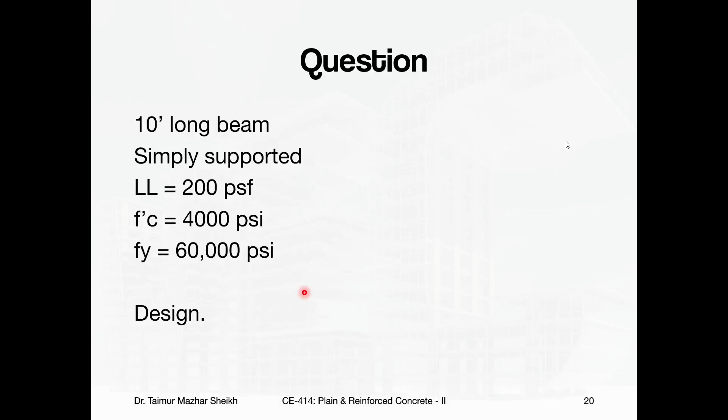ACI recommendations mein table 7.3.1.1 states ki the minimum thickness of solid non pre-stressed one-way slabs, you have simply supported for the height should be at least L over 20. Applicable for normal weight concrete and grade 60 steel only. To hamare paas grade 60 steel hai, so this is convenient.

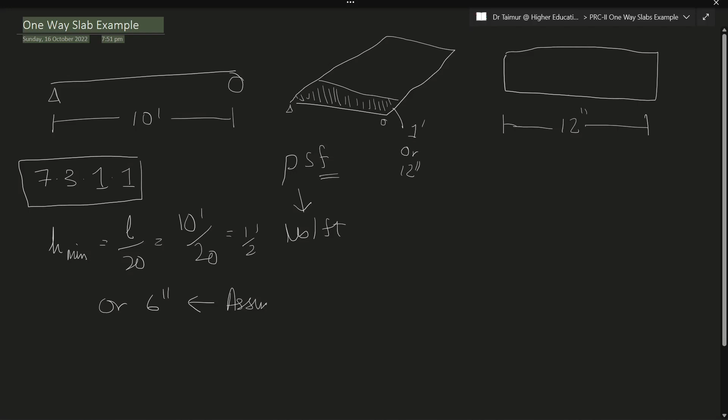To 7.3.1.1 ke hisaab se H minimum should be L over 20, which is 10 feet over 20, which is half a foot or 6 inches. To assume hum isko le lete hain. Hum isse bada le sakte hain, obviously we cannot take anything smaller than this. So assume H is equal to 6 inches. Step 1 done.

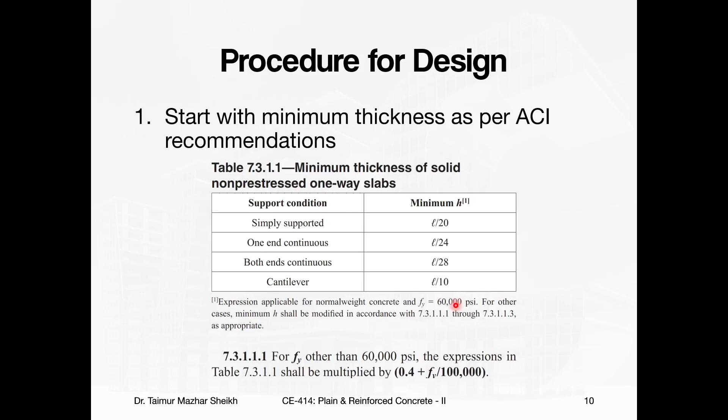Step 2, decide on primary rebar, adjust for cover. Ab jab main kehta hoon decide on primary rebar, main ye nahi matlab ki aap immediately kisi kism ka rebar select karoge, abhi maine number 4 daalna hai, number 6 daalna hai, number 8 daalna hai. What I mean is ki we have to adjust for cover.

Jab hum adjust for cover karte hain for a slab that is not exposed - hamare liye it is not specified whether it is exposed, so you can take this value. To isme you have two options, either for smaller bars or for the larger number 14, number 18 bar. Hamare paas almost definitely smaller bar will be okay.

Aur that's because if you take too big of a bar, then either you're introducing a compression failure, jo humne discuss kiya tha, same for slab mein bhi hoga as per the beam, or the spacing of the bars from one another will be so far away that it actually violates another maximum spacing guideline of ACI, jo hum baad mein isme dekhenge.

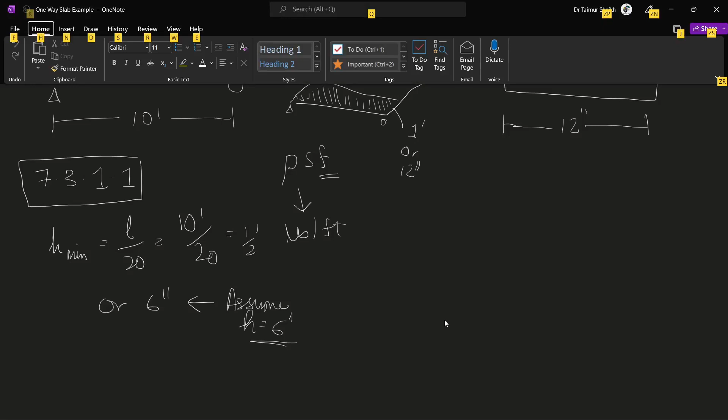To I'm pretty sure it is going to be smaller than number 11. The specified cover is 3/4 of an inch. That's for your measurement mein is table ka naam dekhna mat bhuliye: 20.5.1.3.1. Ye states karta hai ki cover has to be greater than or equal to 3/4 of an inch.

To hamare paas 6 inch ki height hai, isme se minus karenge 3/4, so you will have 5 and 1/4, which is a bit awkward. So assume let's take cover of 1 inch.

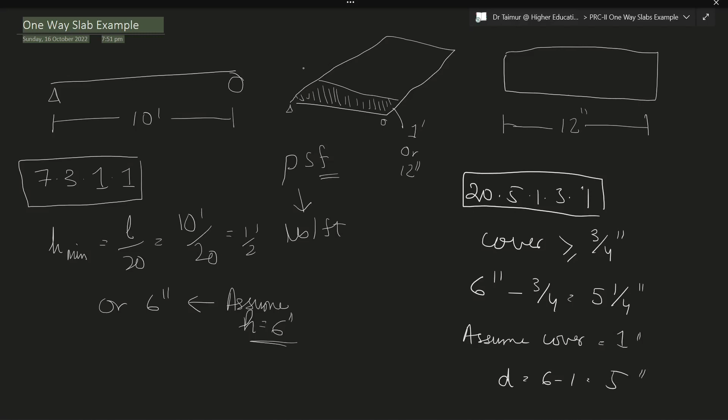Okay, so then you will have a value of d of h minus 1, 6 minus 1, which will be 5 inches. So at this stage we have progressed ki hamari jo total height hai, ya thickness hai slab ki, 6 hai, aur agar hum positions banaye slab ke liye, to hamara value of d depth, yaani ki from the top to the center of the rebar at the bottom, will be 5 inches. To abhi tak hum idhar sukoon se pahunch gaye hain, theek hai.

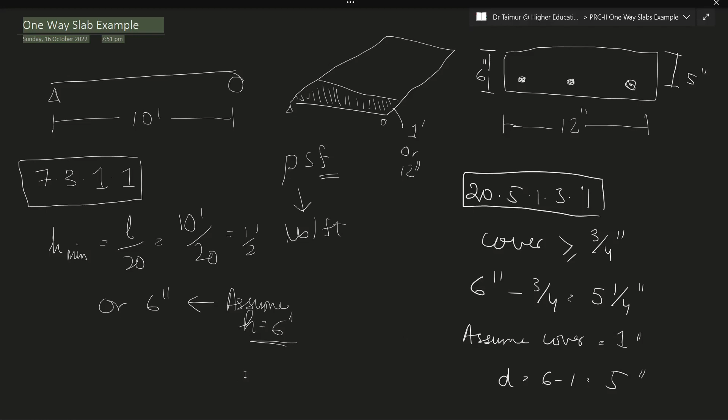Alright. Okay, what's next?

Ensure that whichever steel you've selected follows the specified steel requirements of minimum, at least this much, or maximum. Maximum, probably we don't need to worry about that, but at least minimum we need to figure out. So for this we need to solve this equation for rho minimum. For this we need Rn.

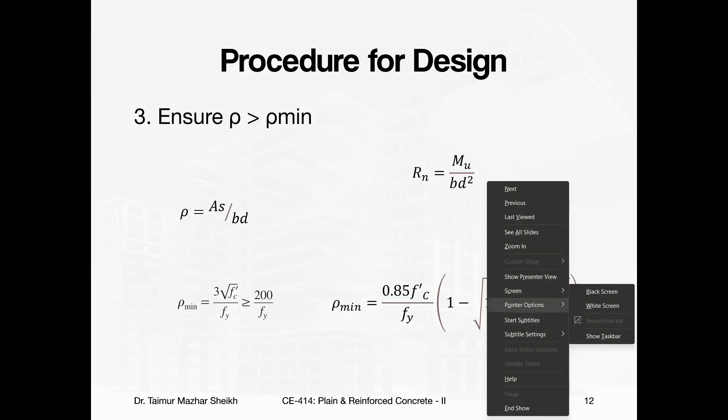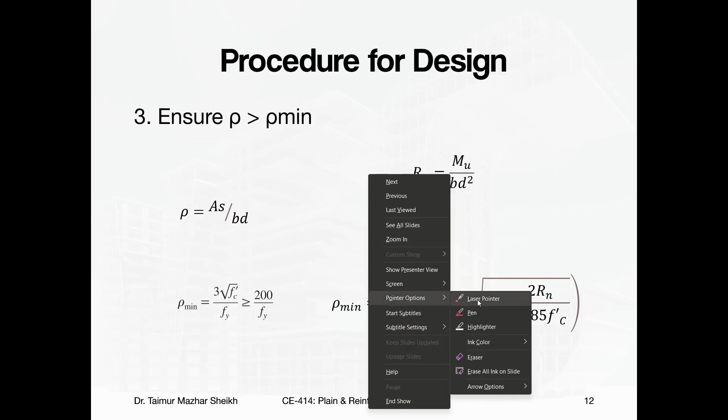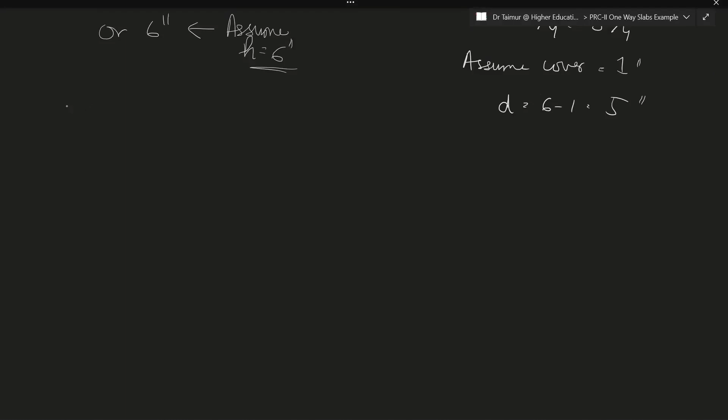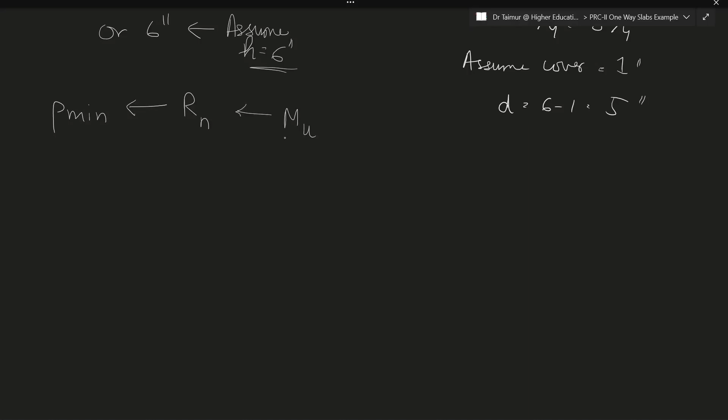So we need for rho minimum, we need Rn. For Rn, we need Mu. What is Mu? For a supported slab, W L square over 8. If you remember, for this we need W.

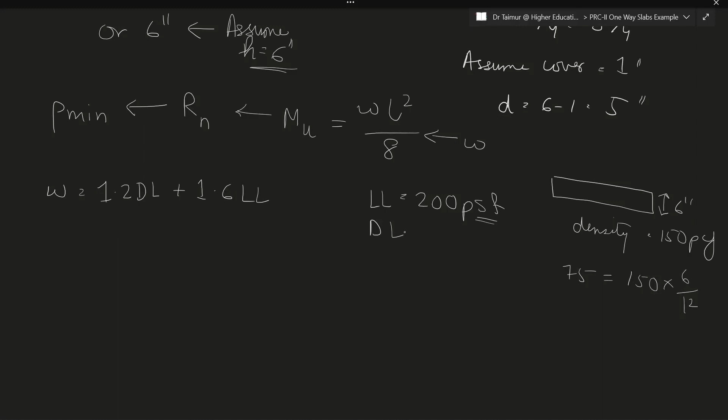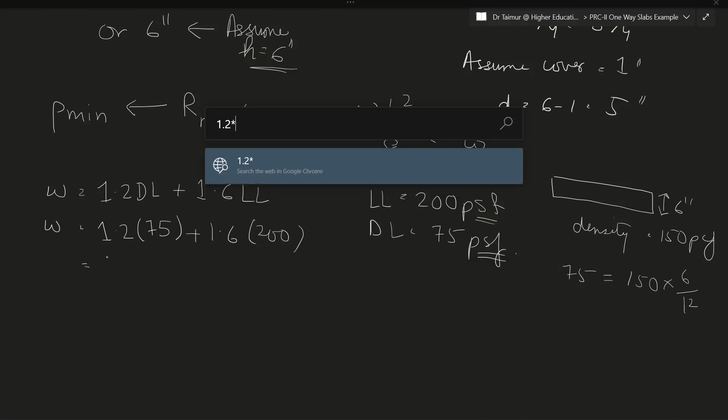Okay, so now let's start plugging them in. 1.2 dead load of 75 plus 1.6 live load of 200. What's the value of this? We can calculate immediately. 1.2 times 75 plus 1.6 times 200, and our value is 410 pounds per square foot.

We can also say pound per feet, for 1 feet of the beam. We'll keep it as PSF, just to highlight that we're working on a slab, not a typical beam. Okay, so this is done. Now from this we can find Mu, which is equal to W L square over 8.

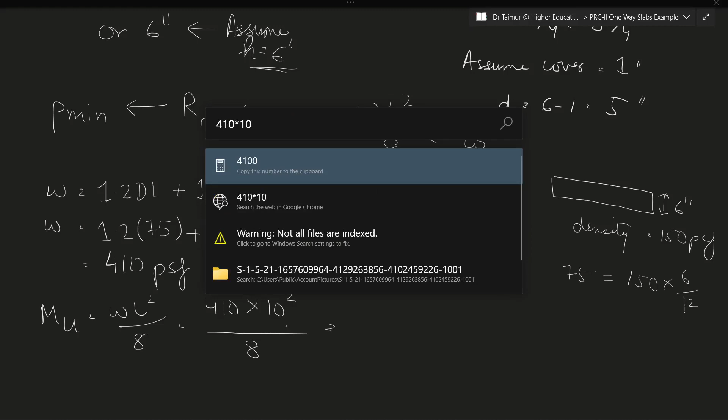410 pounds per square feet, how much is it? 10 square over 8, let's calculate this too. So you'll have 410 times 10 times 10 again divided by 8, and the value is 5.25... actually let's write it as 5125.

What will its units be? It was pound and feet, right? So this will become pound-feet. So now that we have that, we can move on.

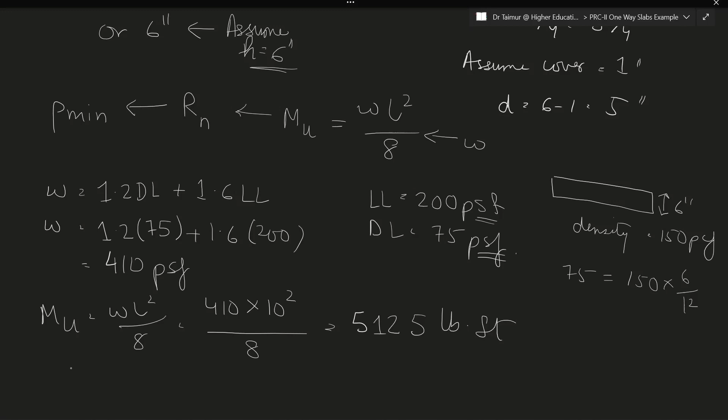And now we can finally get to business. We can get our Rn. And what is Rn? Rn is equal to Mu over phi b d square.

Mu is 5125 pound-feet. You want to convert this into inches, so we'll multiply it by 12. Phi is 0.9, because we want to ensure it's a tension controlled area. Right, we don't typically keep it less than that, so we'll keep the strength reduction factor at its maximum of 0.9.

Later, for verification, we can go through the checks and validate whether we did it correctly or not. B will be 12 inches and D squared value is 5 squared. Let's try to calculate this: 5125 times 12, divided by, in brackets, since all of these are dividing: 0.9 times 12 times 5 times 5. We close it and we get 227.778.

Let's round it off and this will be our PSI, either pounds or pound per... well, when we converted it, we converted from feet to inches, so now it's PSI, pounds per square inch. I hope that's clear.

We were already given that FC is 4,000 PSI and that FY is 60,000 PSI. So we can just plug these in.

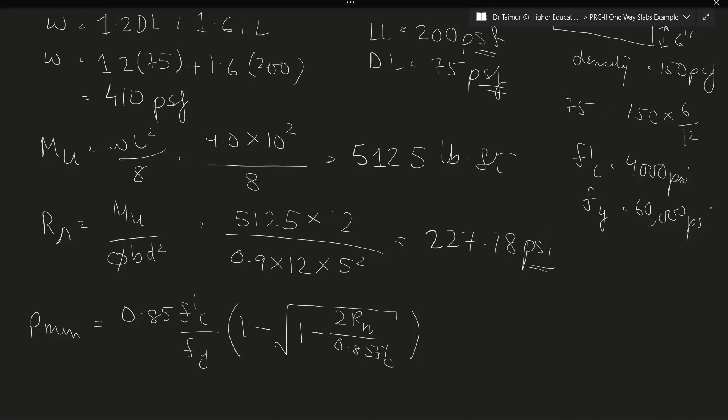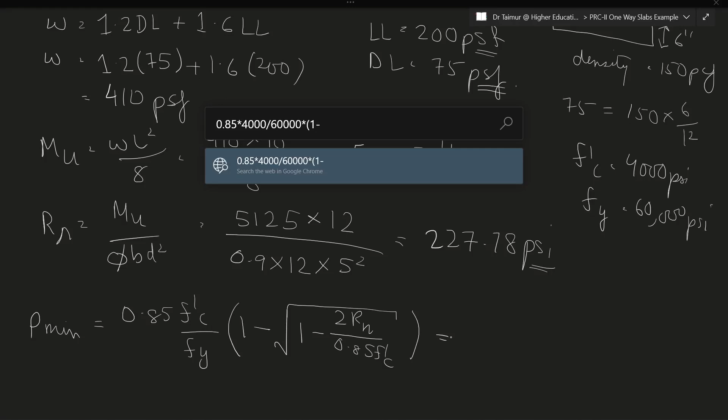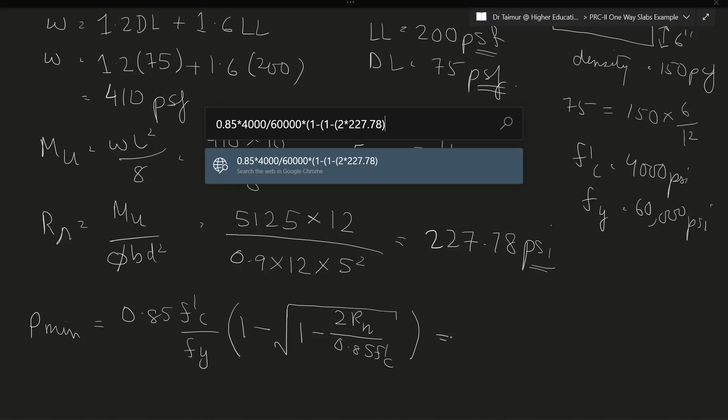And let's do that, this will be pretty long. 0.85 times 4,000 divided by 60,000 times, first bracket opens, 1 minus, and bracket opens, 1 minus, and bracket opens, 2 times Rn is 227.78. I took 78, so let's keep it to 78. Divided by 0.85 times 4,000. Okay, that's the first one done. Now we need to close this, it's a square root so we do 0.5, and then finally we close the big bracket.

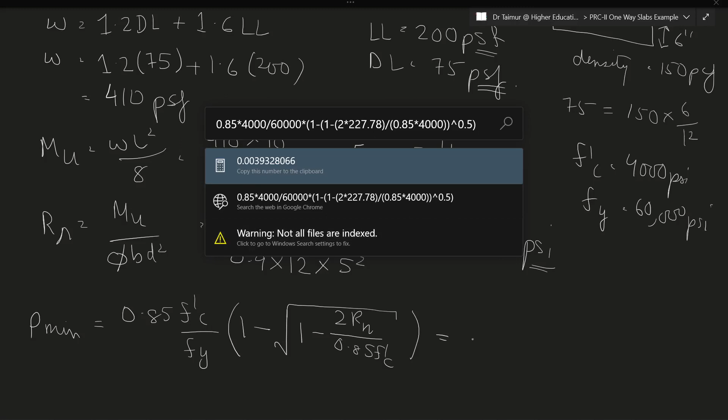Now our value is 0.0039, okay, so we'll go ahead and say 0.00393.

Now we know that rho is equal to As over BD. So we move BD to the other side, and you can say that the minimum steel reinforcement we would need would be rho minimum times the width times the depth.

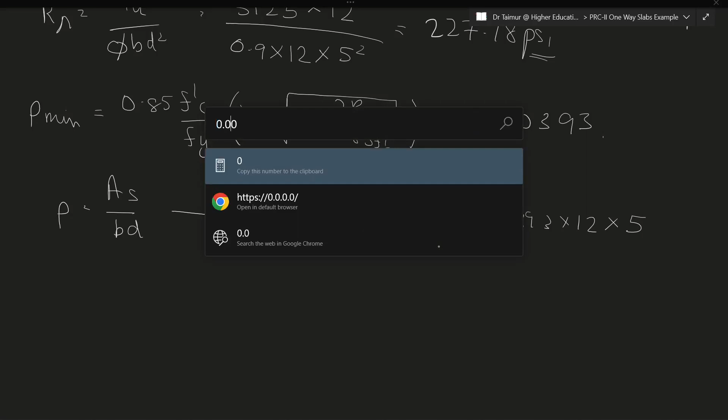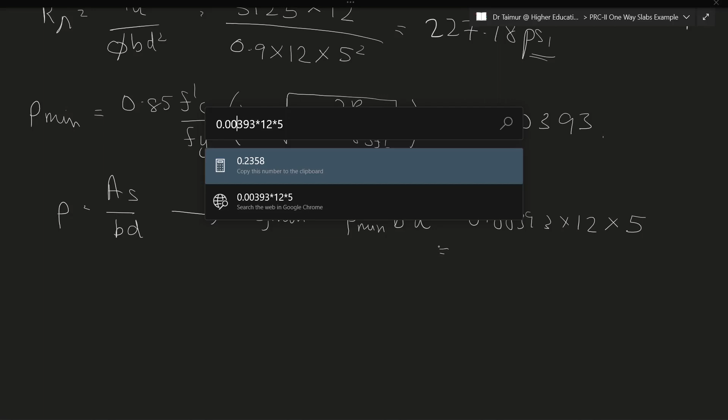We got 0.00393 times width, which is 12, times depth, which is 5. And what does that give us? 0.00393, I hope it's not a minus, all these extra zeros... okay, 0.00393 here, and this gives us 0.2358, say 0.236 inch square.

So we need 0.236 inch square reinforcement per foot of slab.

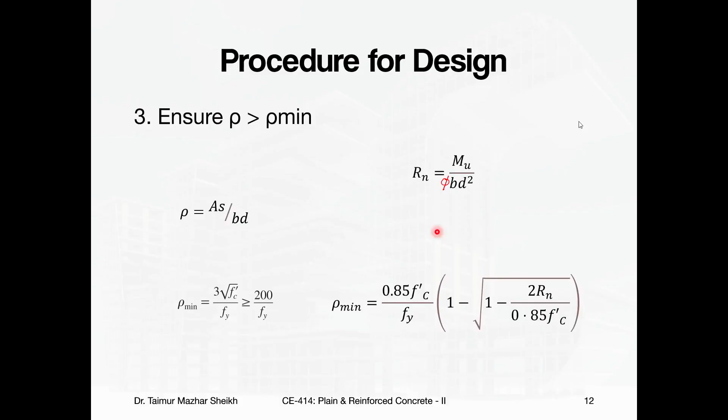Right now we have a scenario where the width is 12 inches, the depth is 5 inches, and As is 0.236.

तो हम वैलिडेट कैसे करते थे? Compression is equal to tension। Compression क्या होता था? 0.85 f'c a b, and tension में as fy। इससे हम निकालते थे a की वैल्यू। उस डिटेल्स में मैं अभी नहीं जाऊंगा क्योंकि it has been done a lot of times in PRC1।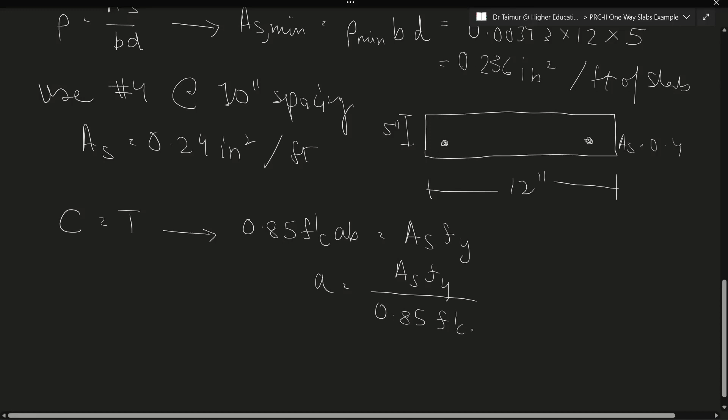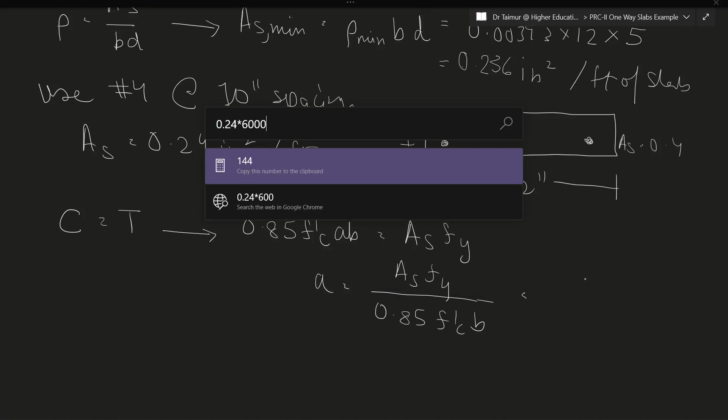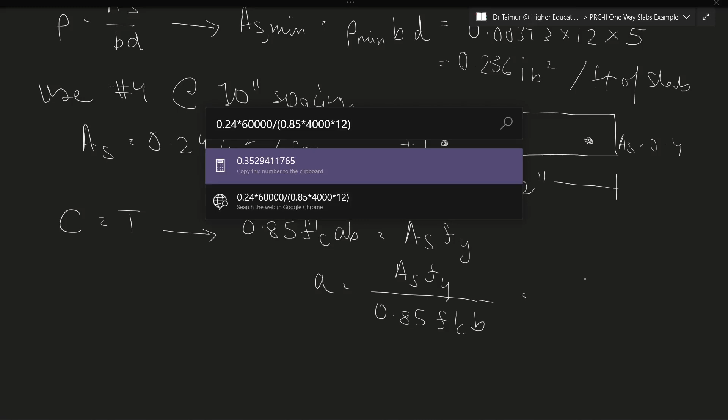इसमें हम values feed in करें तो let's see, as हमारी क्या है 0.24, fy क्या है 60,000 divided by bracket खोलता हूं 0.85 times 4,000 and times the width is inches, keeping it in inches, and here 0.353, let's say.

0.353 inches, ठीक है? अब इसे convert करना है and we know that c is in beta 1। Beta 1 क्या होता है? In case you don't remember, 0.85, let's see if I have it on this slide। yep, हमारा 4,000 है, 4,000 से ज़्यादा नहीं है, तो we will take beta 1 as 0.85।

तो eventually हम इधर आएंगे और फिर अगर हमें c निकालना हो तो is this accurate? I think I flipped it around। I think it's a equals beta 1 c। तो ये मैंने गलत किया हुआ है थोड़ा, मैं इसको सही कर लेता हूं। c will be equal to a over beta 1, which is 0.353 over 0.85, and that will be c.

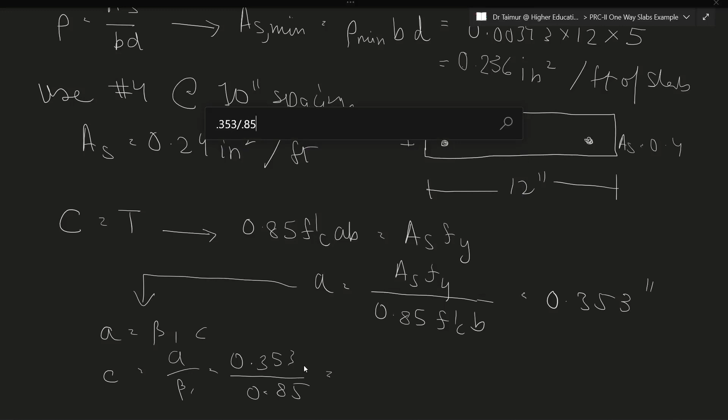0.415. All right। Obviously ये बहुत ही छोटी वैल्यू है comparison उसकी।

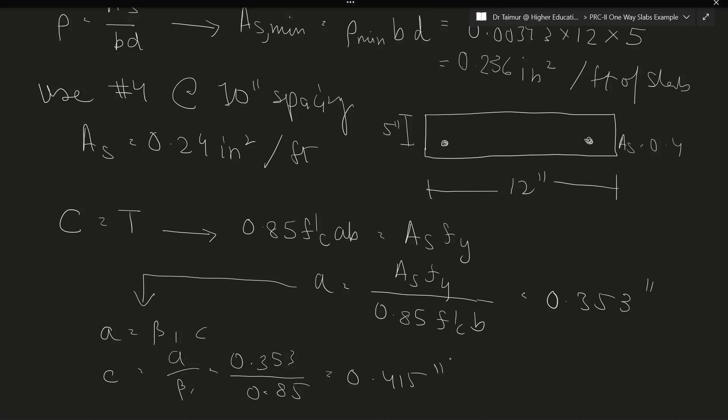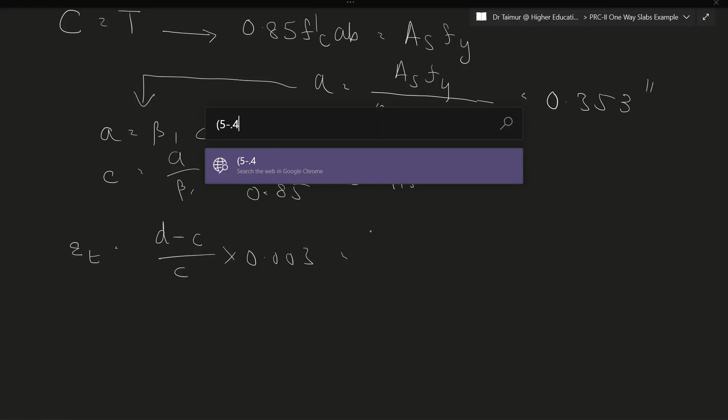I'm fairly sure this will be a tension failure, but let's go all the way। अच्छा, हमें क्या करना होता था, हमें देखना होता था कि हमारी वैल्यू क्या आएगी, which used to be d minus c over c times 0.003। Let's plug it in। d की वैल्यू है 5 minus 0.415 divided by 0.415, right? And times 0.003।

Then you have 0.0334, which is much higher than the 0.00, I think 0.005 से करीबन ऐसा कुछ होगा, तो ज़्यादा था। So therefore tension controlled failure।

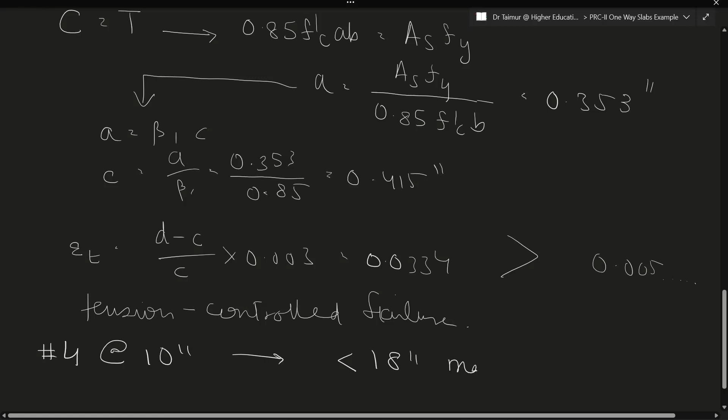ठीक है। अच्छा, what else? Check spacing। अब इधर लिखा हुआ है कि this should not exceed s। This is different, and the maximum spacing shall be the lesser of 5h and 18 inches। ठीक है, our height is 5, so 5 times 5 is 25, or 18। The lesser of 25 and 18 is 18। यानी जो हमारी spacing है, it should be less than 18। हमारी spacing is number 4 at 10 inch, just less than 18 inch maximum spacing। तो ये भी हमारा clear हो गया है।

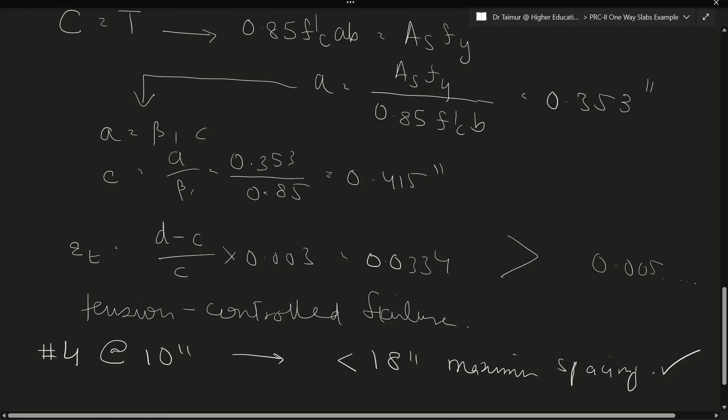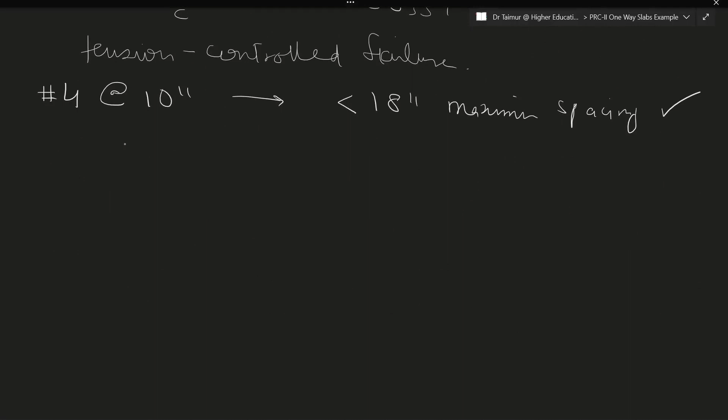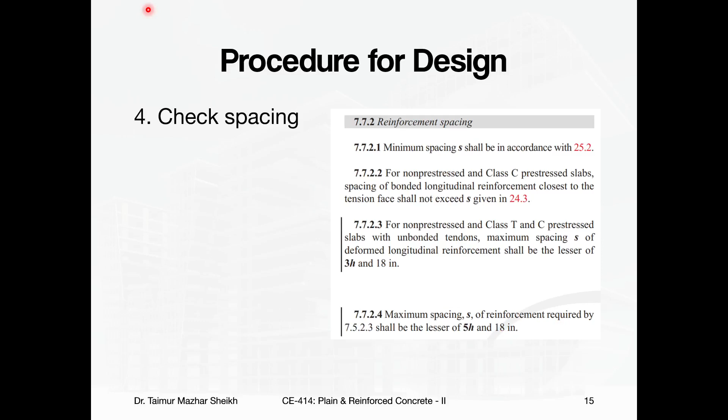ठीक है। So at this stage we're done, right? But almost, shear भी हमें try करना होगा, मगर if you remember, when it is a slab, not only do you have the ones you decided जो ये होंगी, ये वाली हमारी number 4 है at 10, but you also need transverse reinforcement। You need the reinforcement perpendicular to the main। ठीक है। तो number 4 at 10 अगर हमारी जो है इस साइड पर है, तो वाले जो है perpendicular होंगे।

उसका भी एक clause है ACI में, वो इधर लिखा हुआ है on the slide। A minimum area of as min of 0.0018 area gross shall be provided। ag is area gross। ठीक है। तो मतलब वापस आ जाते हैं, and then इधर से we have to go।

0.0018 of area gross। एरिया ग्रॉस क्या होता है? एरिया ग्रॉस essentially जब भी हमारे पास कोई स्लैब होती है, तो जो भी rebars होते हैं, हम वैसे तो सब बोलते हैं कि हां you take your width and you take your height, but not exactly। If you remember, जो भी rebar के नीचे होता है, that's only cover। So we will take it as d, which is 5 inches।

inches आ जाएगा। So now our value is 0.0018 times 12 times 5। अब हम इसे calculate करें। We have 0.108 inches required, inch square per feet of slab। And this is transverse, right? मतलब ये जो होगा ये इस direction में जाएगा, perpendicular to our longitudinal reinforcement।

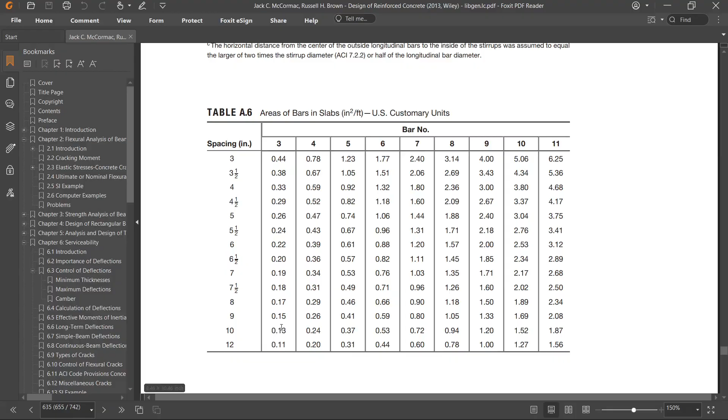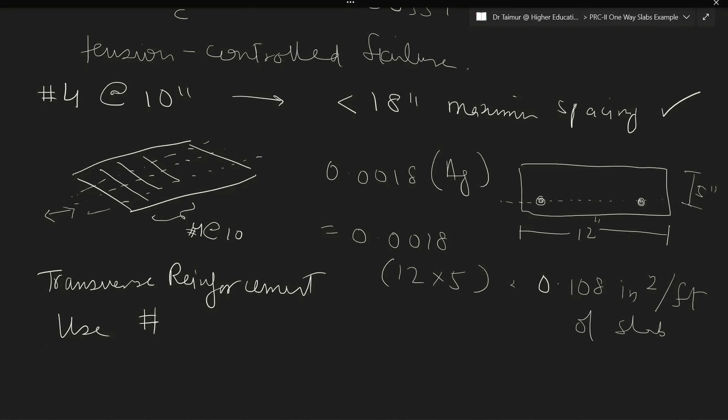अब उसके लिए हम कौन सी spacing देखें? उसके लिए जो हम spacing देखेंगे, let's say इसके में जाएंगे probably somewhere around here। I think this one is okay। Number 1 is too close। So number 3 at a spacing of every 10 inches, and number 3 rebar is valid। मैं आ जाऊंगा, अब बोलूंगा for transverse reinforcement use number 3 at 10 inch spacing।

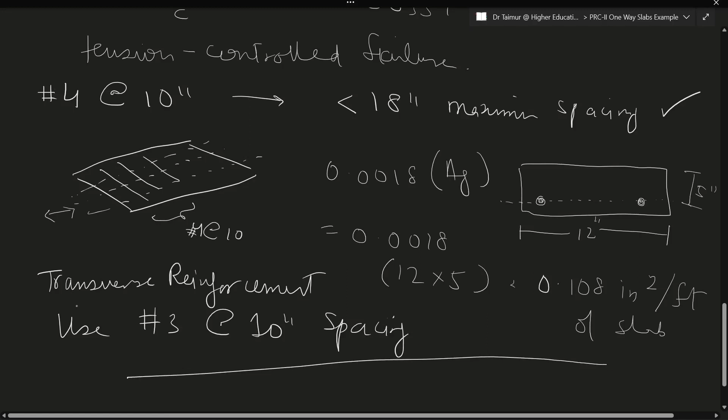ठीक है, अभी flexure complete हुआ है। So now what do you have to do? We have to design for shear।

शेयर में यूजुअली हम क्या करते थे कि डिपेंडिंग ऑन ये बीम है, इट्स सिंपली सपोर्टेड एंड यू हैव अ डिस्ट्रीब्यूटेड लोड ऑन इट. जो हमने निकाल लिया था, आई थिंक इट वाज 410 psf. लेट मी डबल चेक.

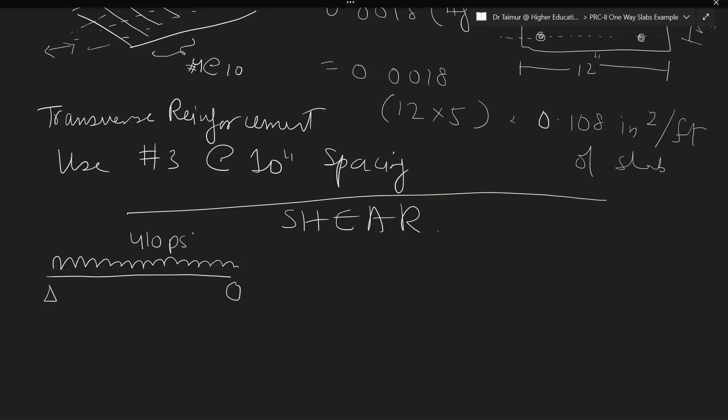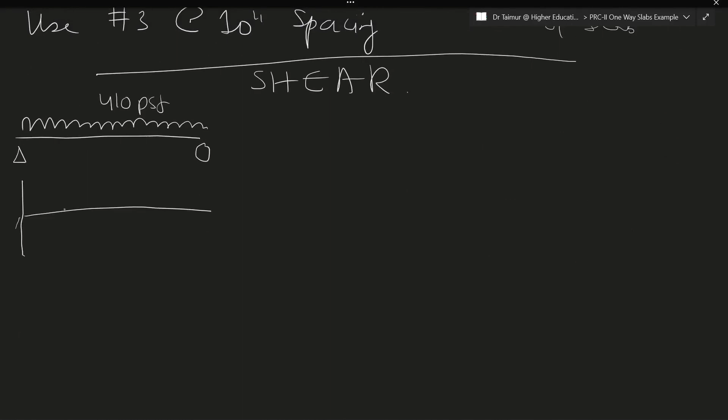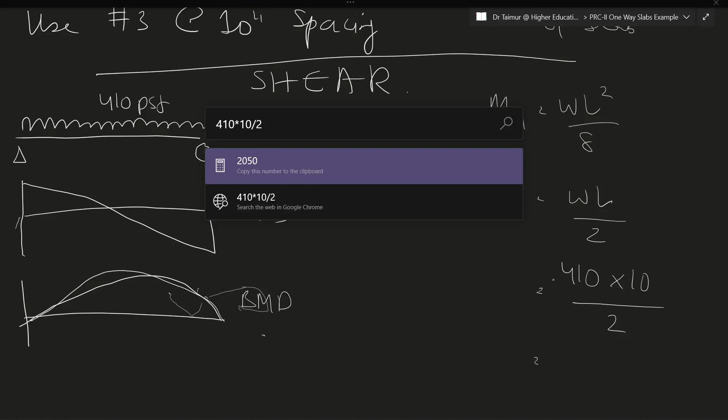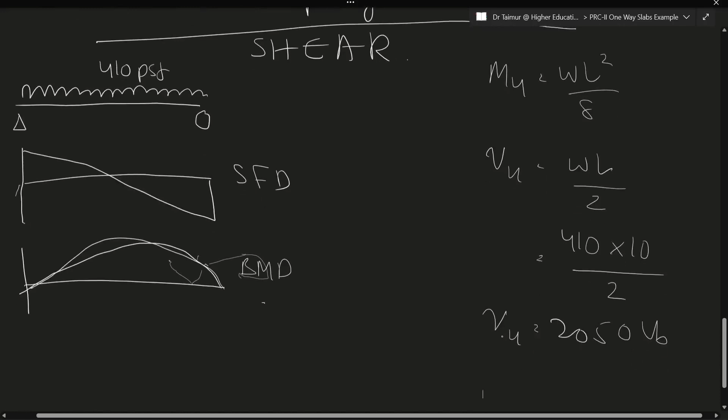Sure. So how do you address it?

So we have when you have any nominal Vn, which would be with the strength reduction factor, which is under steel reinforcement, is being carried by steel, and the rest is carried by concrete. Okay. If we go back to our design slides, shear में, here you have it. This is a formula. जो VC होता है वो होता है 2 lambda under root FC BW D, और स्टील होता है उसकी स्पेसिंग हम निकालते थे using this formula and so on.

Magar, there's this clause that is very interesting and usually true for slabs, which is that for pre-stress beams, typically pre-stress और non-pre-stress के लिए भी applicable है, कि you have where VU is greater than half of the phi VC. यानी कि अगर concrete जो है, it is able to carry more than twice the shear amount being imposed upon it, then we do not need any reinforcement. इसके हमने equations की थी.

तो in this case, let's see, VC is 2 lambda root of FC BWD. So we come to lambda क्या होगा? Let's just see what lambda is. I think we can just take it as 1. I can't remember. ठीक है. So we'll take it as 1 for now.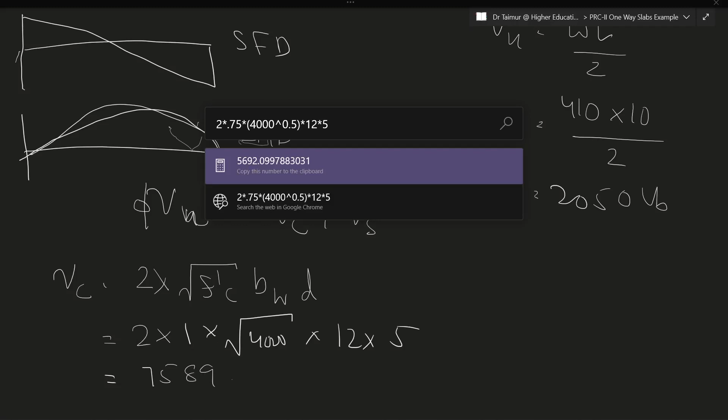Yeah, lambda 1 0.75 डालना है. I think जो 5 होता है वो दूसरे उसके लिए होता है. And this will give you not this value but instead 5692.

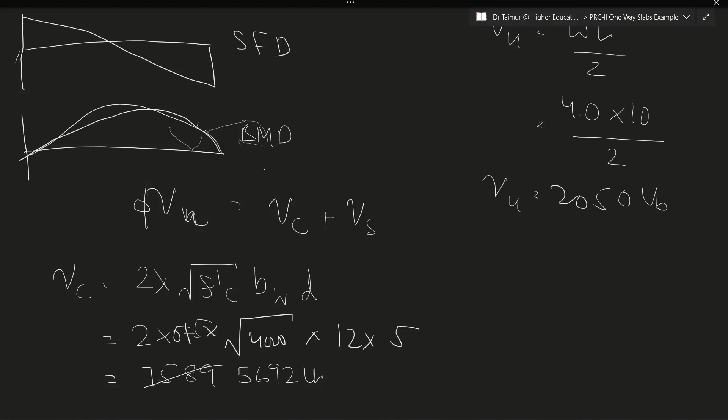Now what is VU? VU is this, मगर इसको हमें strength reduction factor के साथ, फी के साथ डिवाइड करना है. फी इज इक्वल टू 0.75 for all things related to shear. So 2050 divided by 0.75 will give you 2733.

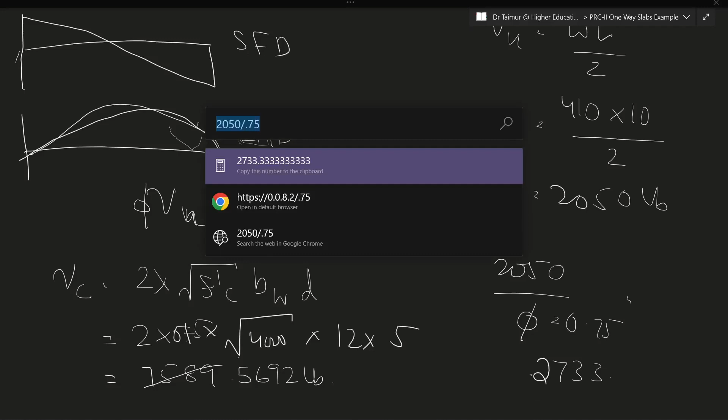अगर हम इसको मल्टीप्लाई भी करें, 2733 times 2, 2 VU over phi will give you 5466, which is less than half of VC, which is 5692.

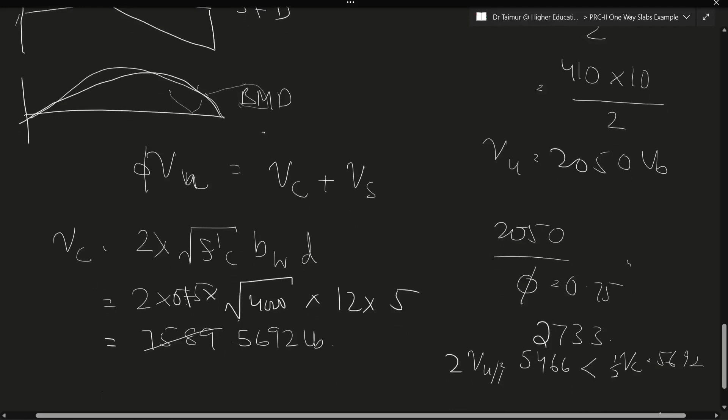In other words, the concrete itself can carry more than twice the shear on it, regardless of any steel. Therefore, no stirrups required. Keep in mind in this we have made a shortcut also. Typically आप exactly जो है कोने वाला VC नहीं लेते, but you take it at a distance D. Now the point being कि if it can handle this weight, it can definitely handle it at a distance D behind it. ठीक है. So no stirrups required.

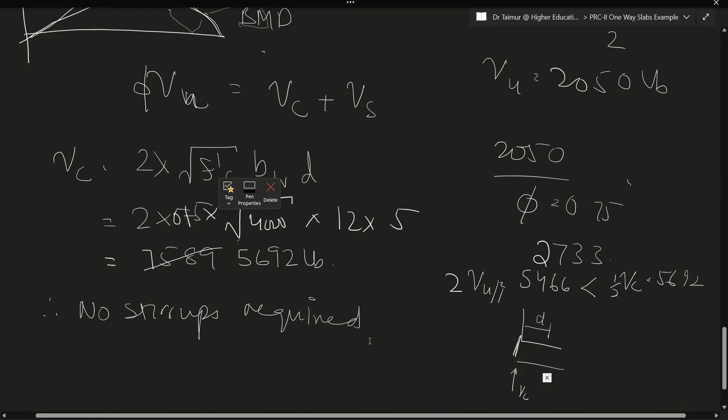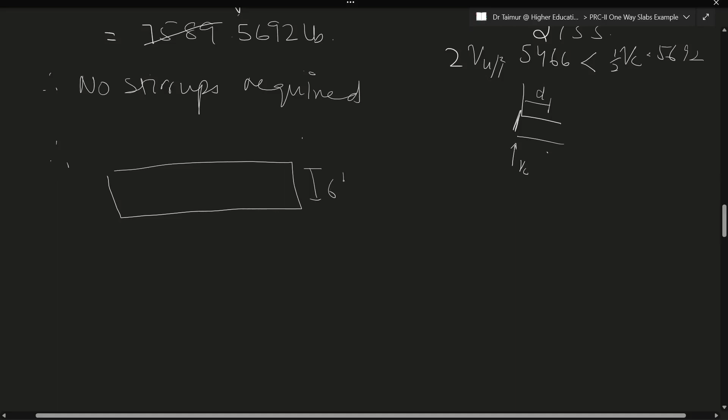So now, finally, it's clear to go, and therefore you have chosen our standard, a 6-inch thick slab, number 4 at 10-inch spacing, which is longitudinal, basically along the direction, rather perpendicular direction of the supports.

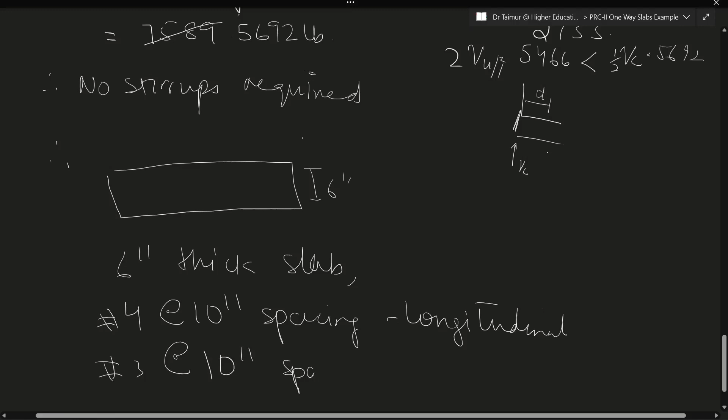And number 3 at 10-inch spacing, जो कि हो जाएगा हमारा transverse reinforcement, and both have been checked. ठीक है. Thank you.